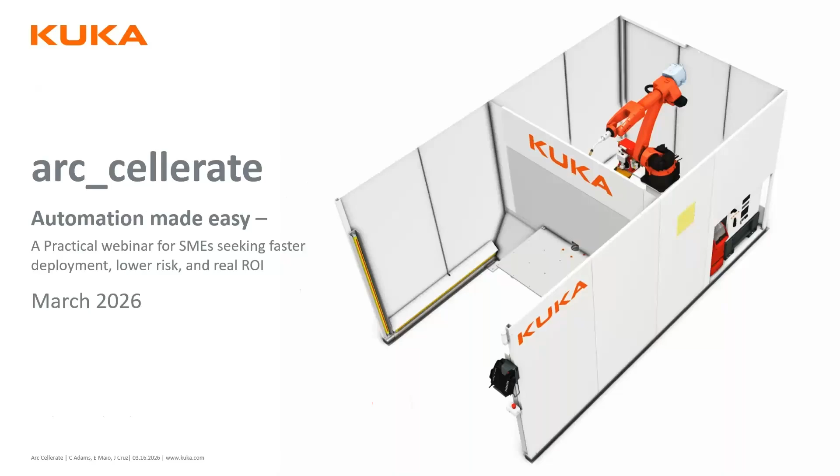My name is James, and I've got more than three decades now in manufacturing. I'm a welding engineer by degree and spent most of my career working in that capacity. The first 10 years I was in high volume manufacturing in the automotive industry at Honda, working at the Marysville Auto Plant, where we made the Accord and some of the Accord platform vehicles. Then I was at an engineering consulting company, a welding engineering consulting company, for almost 20 years. And I joined KUKA about 2 years ago.

At the company I used to work for doing engineering consulting, I saw everything from surgical devices to automobiles, and everything in between, how to stick stuff together. I can't tell you how many times I'd been in situations during that part of my career where having a pre-manufactured cell would have really been helpful. One of my colleagues used to say at that job that we worked on everything from microchips to battleships, so a lot of different form factors that we were able to see.

Along with me on the webinar today, in addition to Jules, I've got Charlie Adams and Evandro Maio, who also have more than 40 years combined experience in automated welding process. And I'm just an old Ohio State guy, so I had to bring them here with me to help answer the hard questions that you might have at the end.

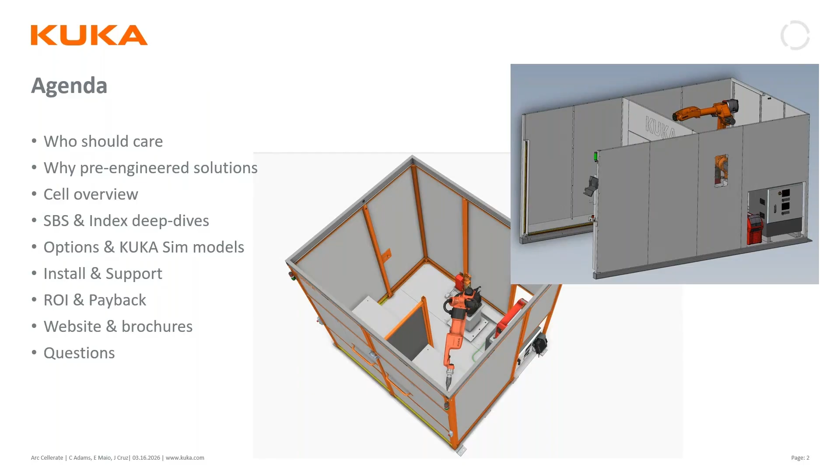So who should care, right?

This talk, this session, and really the cell itself is primarily meant for manufacturing engineers and production managers, either at small to medium fabrication shops, maybe at OEMs where they want to integrate a number of compact cells, or even contract manufacturers who handle a variety of jobs and could take advantage of a standardized cell to feed different jobs through.

The common thread between all of those people is they're looking for compact, economical automation solutions, and a short learning curve, so they get a fast return on investment, without the cost of building up their own internal design staff and controls team to come up with their own cell concept.

If you're wondering what the benefits of a cell like this are, the reality we're all dealing with, and I see it time and time again from customer after customer, is it's harder and harder to hire and retain skilled welders. Retirements are accelerating, and people seem to want to get out of those hot, dirty environments faster than ever before. That's creating variability in capacity for a lot of our customers, which pushes overtime onto the welders you've got left on staff, making it even harder to retain those folks.

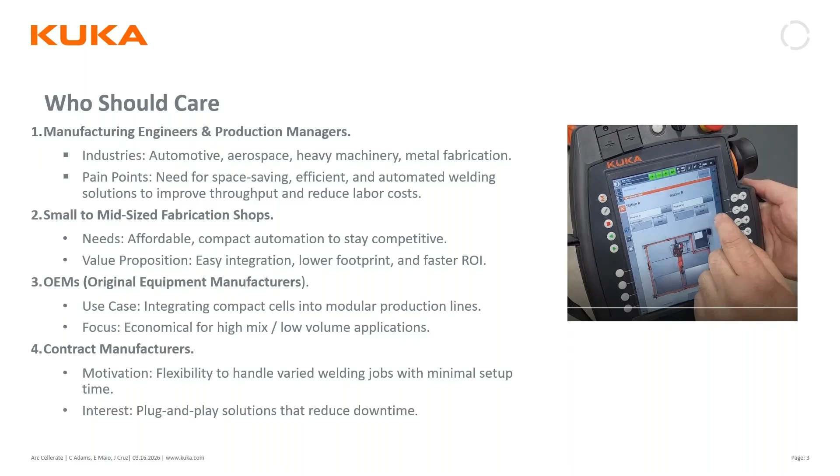It doesn't have to be like that. We're here to help you talk through why it doesn't have to be like that, and maybe a little bit better way to do it.

So the next thing we want to talk about is a comparison between pre-engineered cells versus custom cells. At the end of the day, I think you can look at it through a program management lens, and it comes down to scope, schedule, and budget. I'd actually throw in quality as a fourth aspect to consider.

With custom systems, they're excellent for what they do, and for complex, multi-step assembly processes, you might be stuck with doing a custom system. But the spec, bid, and evaluate cycles you go through with integrators for a custom system really add complexity to the scope. It adds months to the schedule, and obviously the cost is going to increase.

You know how cost comes with customization for anything you do, from customizing a car, to when you look at the base price of a home build and then want to add a basement, or a fourth bedroom, or whatever. Customization obviously impacts the budget and the cost.

It also builds risk. You have to make sure your spec covered everything you need, and then you've got to make sure the integrator's bid addresses the spec thoroughly. It's really tough to do all that when your team is lean.

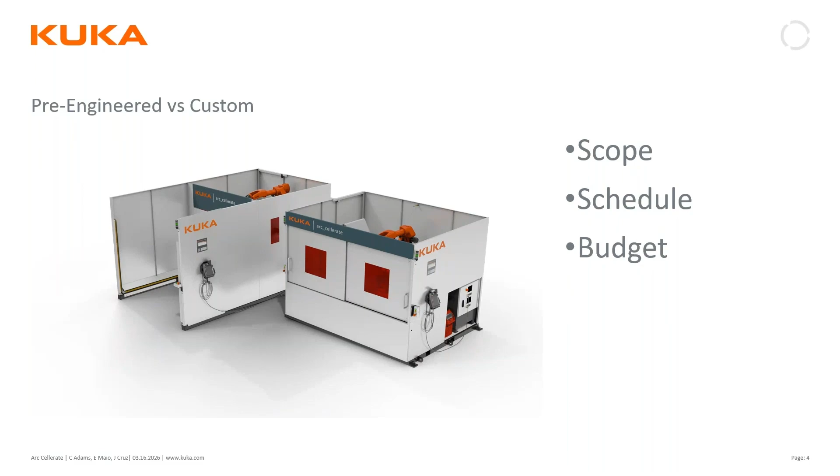Let's do a little overview of the basic cell. As we've said, it comes in two standard configurations that share a common platform. The side-by-side is a two-station cell optimized for space constraint and continuous operation. The index cell has a dual zone rotary table with automated indexing and sequencing for higher throughput.

Both cells are built around our KUKA KR6 R2010 hollow wrist robot. It's got a 2-meter reach, and comes standard with a Fronius TPS 400i power source. Both systems also have our intuitive HMI, and all of it is built into a solid wall safety enclosure.

Operating it is really familiar, straightforward, and up and running in no time. Notice something I didn't mention as standard equipment? What about the PLC? That's because everything in the cell, from the safety system to the turntable indexing to the torch cleaner, is all run through the robot. So there's no need for a standalone PLC, which simplifies the learning curve and gets you to full production in a much simpler package.

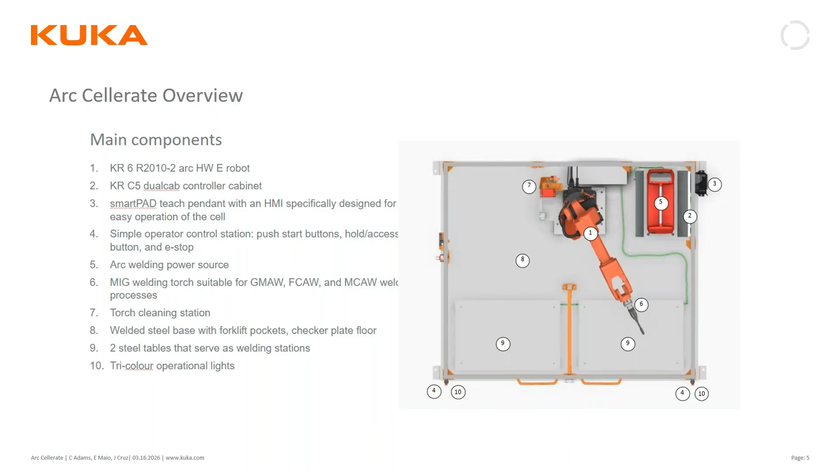A little deeper dive into the side-by-side system. This is a picture of our arc_cellerate side-by-side system taken a couple of months ago at our facility outside of Toronto. The side-by-side really is a system that punches above its weight. The overall cell footprint is 104 inches by 130 by 91, which we found is an easy fit into a lot of our smaller shops.

The obvious advantage of the two stations is that you can have one job loading on one side while the robot welds the other, enabling continuous operation without the extra door motions you need in some other designs. We've seen this work out in a couple of different ways. Some customers run left and right components on the left and right side of the cells. Others use replicate tooling on each side to get double the throughput. The beauty of the automation is it opens the doors to all kinds of possibilities, depending on how you need to run to make the manufacturing you need to make.

Fixturing space is generous. Each table is about 46 by 24 inches, with a standard hole pattern allowing for really easy fixturing. Everything's made out of solid steel - the walls, the table - which makes it really sturdy and easily transportable, not only to deliver it to you but also to move it within your floor space if you need to.

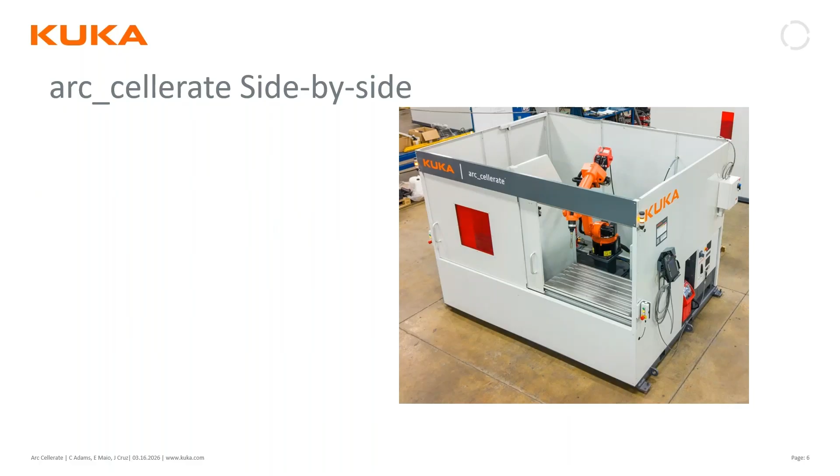Next, let's take a look at the indexing system. When takt time is a little tighter and you want even fewer manual touches, the indexing cell adds a dual zone rotary table - our KP1 - with automated indexing and sequencing. Each side supports up to 500 kilograms with a 42 by 31 inch working envelope. The index time is about 2.5 seconds, so material really keeps moving through this cell.

As with the side-by-side cell, you get the same solid steel walls, appropriate light curtains, tricolor beacons - all the stuff to make sure everything stays safe.

You might be wondering which one is best for your application. A good rule of thumb: use the side-by-side if you're really budget conscious and need something compact with a 2-station continuous flow. If you've got higher requirements for takt times, you might want the indexing station instead. Both share the same robot, power supply, HMI, and safety philosophy, so training and spare parts are really simple. We can also help you figure out, based on your application, which one we'd recommend.

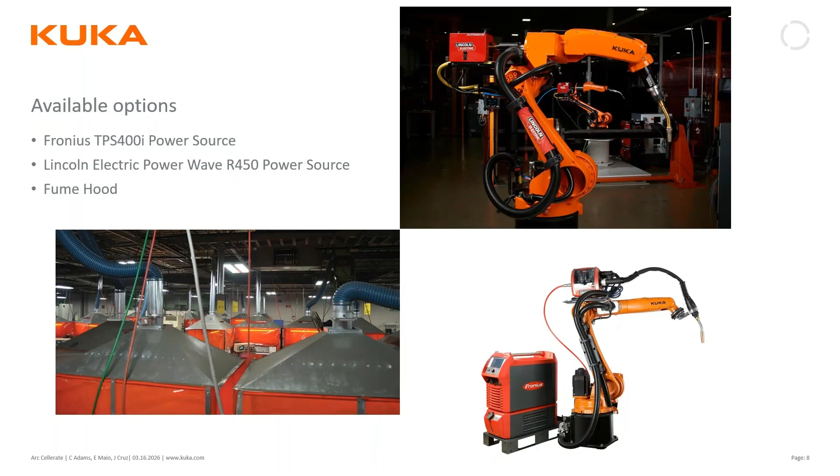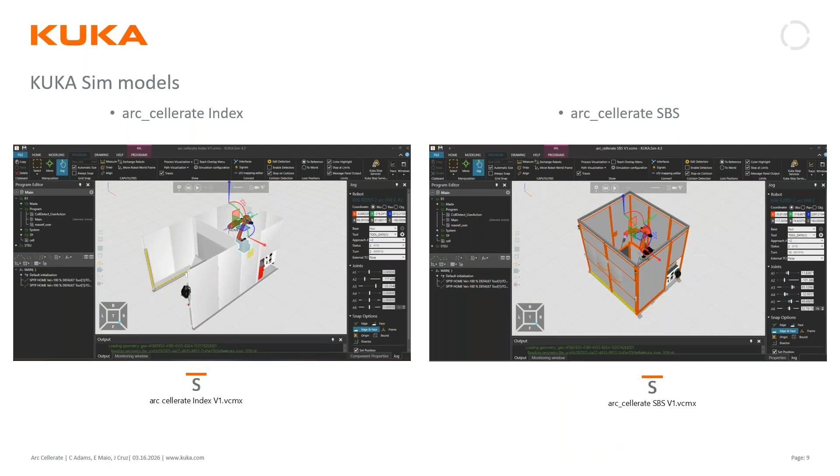If you have more questions about KUKA Sim and what it can do, please reach out. We're happy to share more about this amazing time and cost savings tool. We've got staff sitting in Shelby Township that sits and plays with KUKA Sim all day, so we're happy to talk through the advantages and help share with you what it can do and how it can make ArcCellerate an even faster implementation when it gets to your floor.

Wanted to put a couple slides up, talk a little bit about installation and support. When we deliver your ArcCellerate system, it's going to come with all the manuals and technical data that you need. There's also a QR code on the cell that guides you to installation instructions, which are really pretty easy, and I'll touch on that a little bit in the next slide.

If you have other KUKA products, you should be familiar with our hotline. And if not, you'll be in for a treat—it's kind of a one-stop shop. Call the 1-800 number, and by looking at your serial number, we know what you've got, and it will allow us to direct your call and get the answers to the questions that you need in a very timely fashion.

Our sales and after-sales support flow through the same standard KUKA channels, so onboarding is predictable, even for lean teams. It's what you already know if you've got KUKA. And if you don't have KUKA, you're going to really value the one-stop shop of being able to call and get the answers that you need.

If you need further support, we can align with your site schedule and training plan to make sure that you're successful with the implementation. No robots get stuck in a corner. We're here to support you to make sure that you get the payback you're looking for, and see throughput increase and quality increase, just like we've talked about in the previous slides.

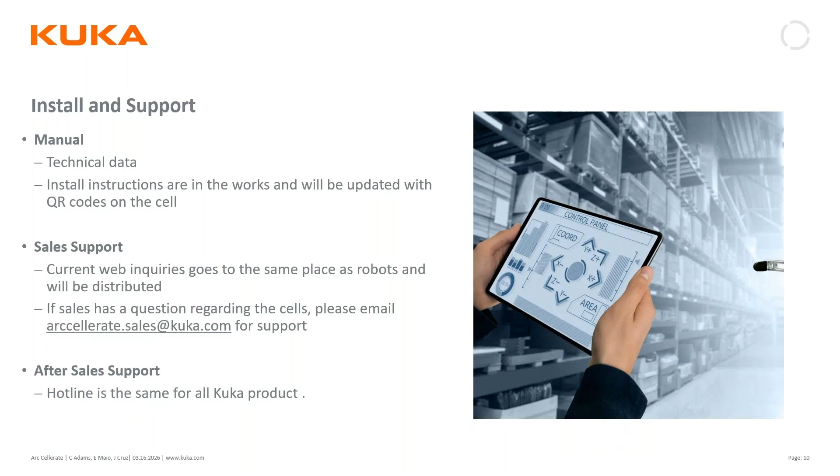So let me take a walk through the path to get to your first arc. First up, make sure that your site is prepped and ready. Have your utilities ready for when we get there. For the ArcCellerate, it's actually pretty easy because there's only one drop required, and it powers the entire cell.

Then on the big day, your cell arrives and everybody's smiling and happy because you got a new tool. It gets even better because they realize the cell comes with fork pockets built into the steel base, so you can quickly and easily transit the ArcCellerate from your dock to the spot, or move it around for future moves, since the shop floor is often a changing beast depending on what's flowing through. You park the cell in place, drop the power, plug it in, and everything comes to life. You're ready to strike the arc.

From a training standpoint, we can meet you where you need us to be. We have options for training on site, or if you prefer self-paced training, there's a QR code that points you to on-demand content to refresh or reinforce the skills you already know. Or we'd love to host you at one of our training centers for in-depth training, not only on the operation of the robot, but electrical and mechanical training as well, at our facility in Shelby Township. I also said I wanted to hit on ROI to make sure that the CEO and CFO is happy.

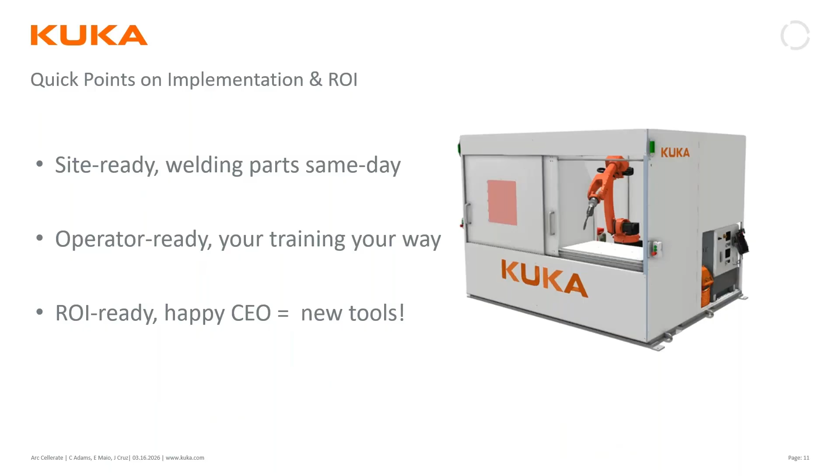A lot of manufacturers plan for 1 to 2 years payback depending on part mix and volume, and we can help you walk through an ROI worksheet, plug in the number of welders you have, shifts you run, wage rates, volumes, that type of thing, and review it together to make sure the numbers you put in make sense, are realistic and defendable. That makes your justification to the CFO much easier when you're looking to get a purchase order signed for one of these systems.

So if you'd like additional information for follow-up or sharing with other people inside your organization, there is a product page.

It's your one-stop shop for all the product details and contact information to get your own ArcCellerate on order. After the session, we can send out a link where you can access all of this content. Also on that page, there are links where you can download your own worksheets or brochures for the side-by-side and the index systems, which you can review internally. It has more detail about technical specifications of each system that I wasn't able to cover today.

But always, it's also going to have our contact information in there. That's always the best thing to do—reach out to us. We'll set up a call with me, you, Avandro, Charlie, or one of our other welding team members, to make sure we can get you the answers you're looking for and help figure out if ArcCellerate is the right option for you.